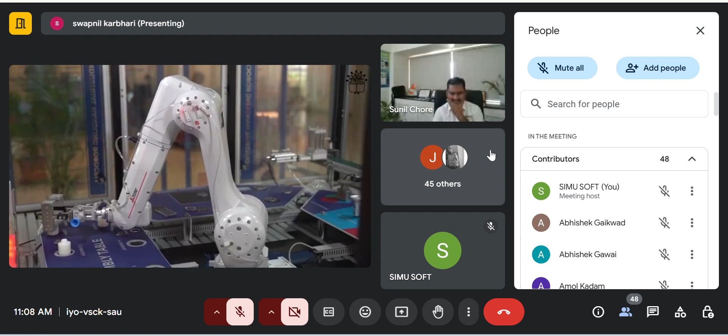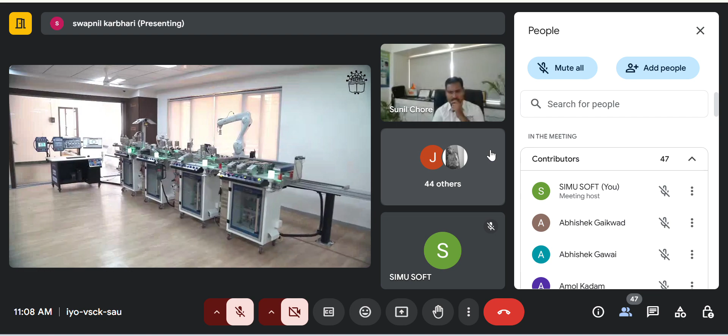To cater to the ever-increasing needs in this sector, Vidya Pratishthan Baramati has established a Center of Excellence in Digital Manufacturing and Robotic Automation. This Center of Excellence has been established in line with the vision of Honorable Shri Sharad Chandraji Pawar Saheb.

With valuable guidance and support from Honorable Pratap Rao Pawar Saheb as well as all trustees of Vidya Pratishthan, this Center of Excellence is funded by Finolex Cables Limited, and Simusoft Technologies Pune is the implementation partner.

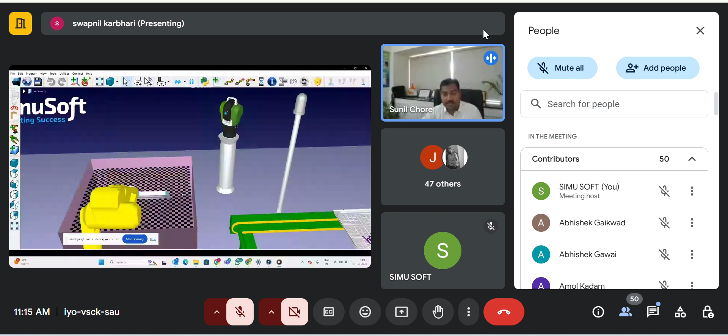So this is how we can really make the exact replica of your actual system in a digital environment and get your work done.

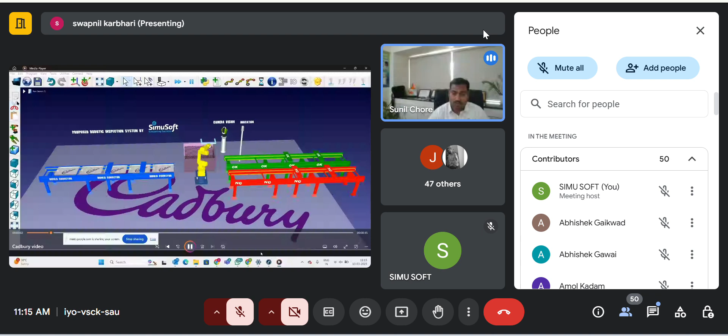Now, if you can give such problems to your students, you don't need to buy anything, you don't need to buy any big complex robotic system or vision system. But at least for third year and fourth year students, you'll be able to clearly tell them this is the phenomenal magic you can create in a virtual environment. And believe me, this is not only an animation product, it is hardcore software used by companies.

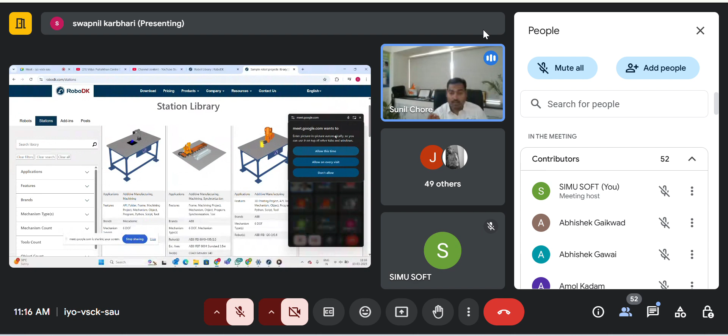Companies like Bajaj, Bharat Forge, and Pari use this software, and people who know this product have high chances that your students can be placed in very good career options in manufacturing, automotive, at any corner where robots are used.

So, without taking more time, I'll request my engineer to share the exact screen of the RoboDK product, and along with your involvement, we will create some simulation models of an existing problem using RoboDK. At the end, we will talk on AI integration with the RoboDK product.

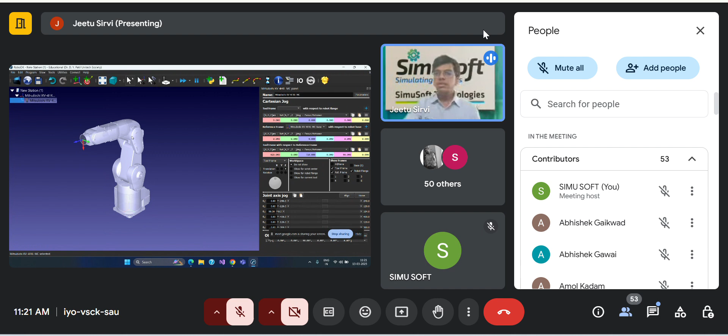By double clicking on the robot, you can see the panel. This is the teach pendant of the robot, where we can control its axes individually in X, Y, Z, and the other three axes are roll, pitch, and yaw.

Now I need a tool to perform an operation. There are various types of tools in our RoboDK software, like laser cutting, deburring, pencil tool, vacuum grippers, and various welding guns. Here you can see e-grippers, magnetic grippers, vacuum grippers, and generic paint sprayer.

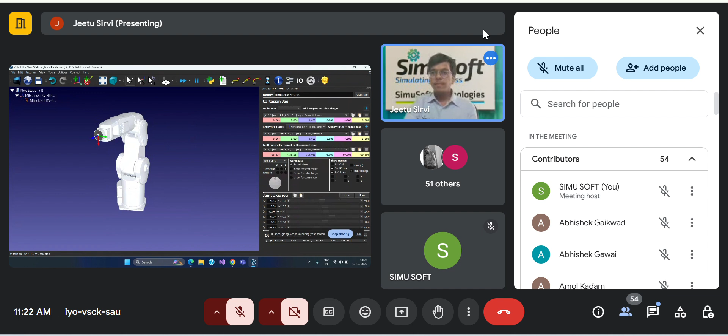Does anyone have questions from till here? Any questions? No. Okay.

So how does RoboDK simplify robot programming? Actually, there is no need of any hardware material required, and we can directly give the targets to the robot by moving the joints of the robot from the teach pendant.

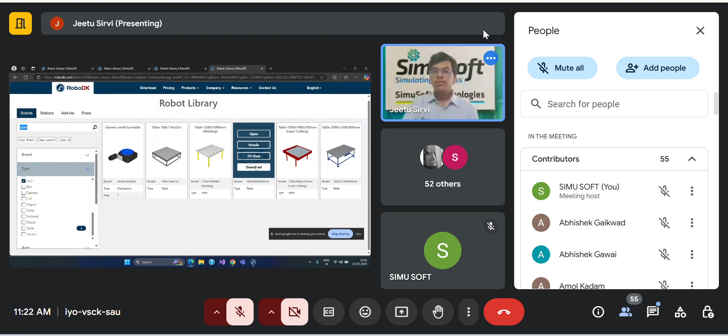Now I will open my online library and download a small table. We will add a table, directly download it and open it from our tab.

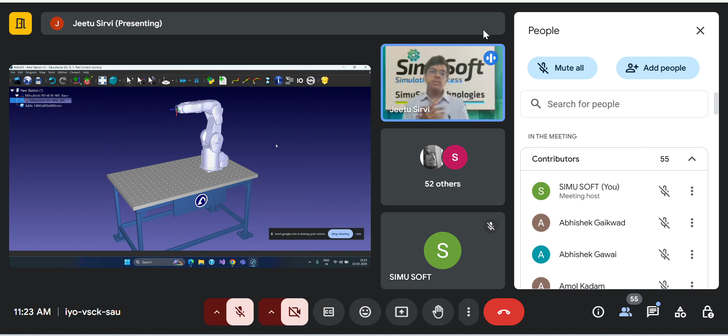You can see the base of the robot is directly attached to the table. It is very simple to use RoboDK software, and we can add this in the curriculum for academics from first to fourth year engineering students. It will teach them manufacturing, research, and how the assembly line works in the industry in real time.

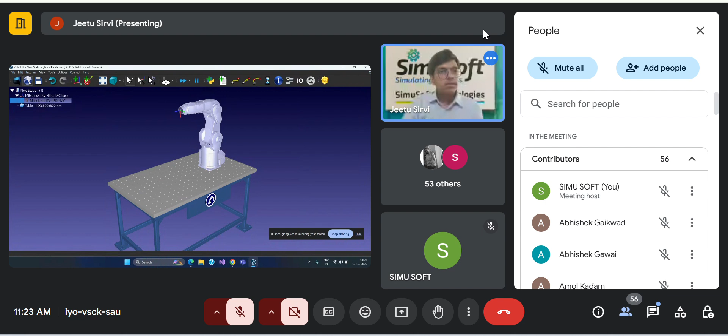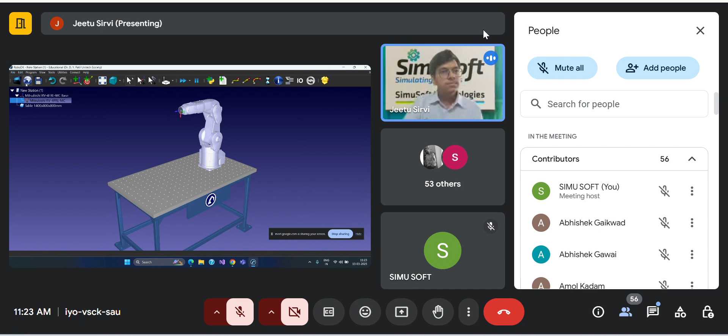So let us add a small cube or box to perform a pick and place application here. You can directly move the box from here using the teach pendant.

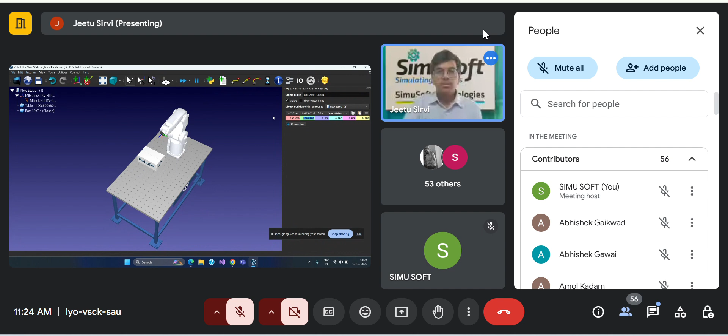Now there will be a question, right? By adding this star button from the keyboard, you can see the workspace of the robot. The workspace of the robot is the maximum range the robot can move or work in the environment, so this is the maximum reach for the robot.

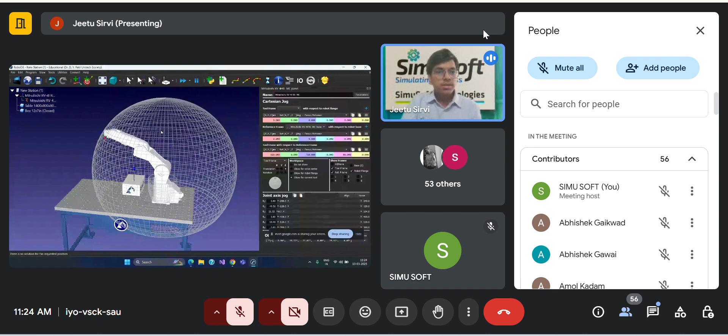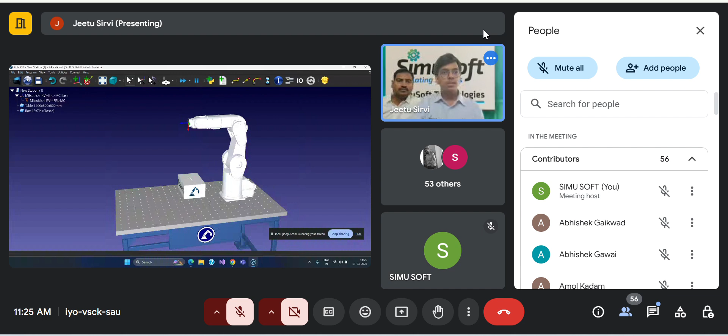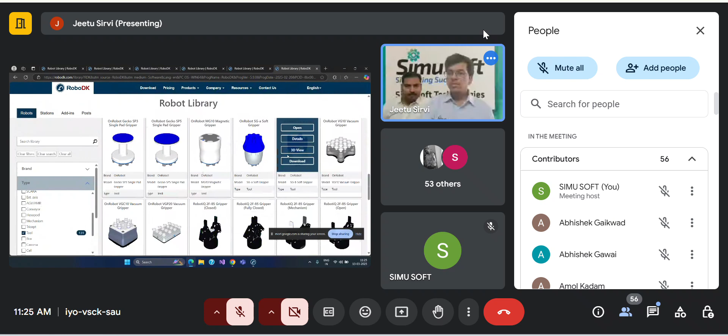Now we will add a gripper to the robot. Again we will go to the online library, go to the tools type, take a vacuum gripper, simply download it, go to our offline library, and add the gripper.

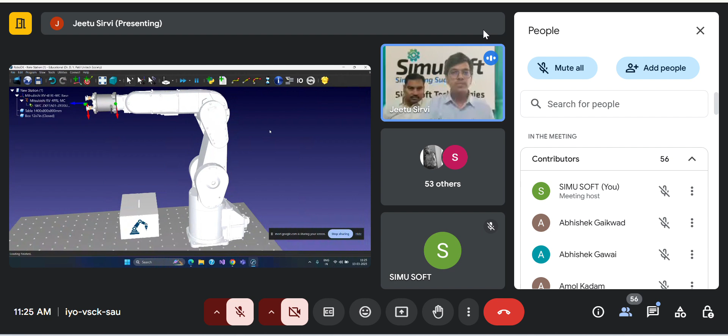You can see the gripper is attached to the robot at the end effector. Now the end effector face should be parallel to the box, so you can directly change the joint angle. The joint angle for the end effector is joint 5, so I will simply move it in joint 5.

Okay, simply I will set it to 90.

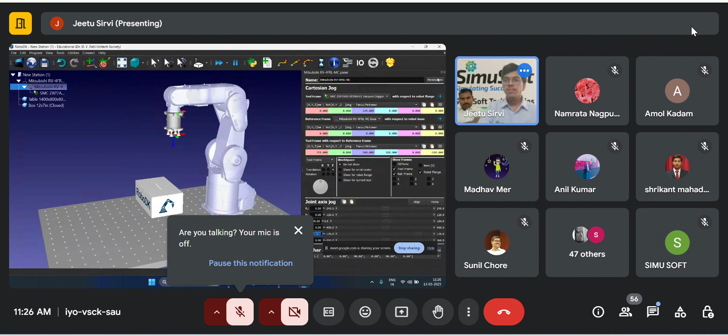Many industries use RoboDK for automotive manufacturing and assembling of various parts. Not only assembly and manufacturing, we can also do 3D printing, and we can integrate this robot with AI for various projects. It will be beneficial for students as well as for them at industries, showing how it actually works.

So till now, does anyone have any questions? Any questions till here? Am I audible? Yes, you are audible. Okay.

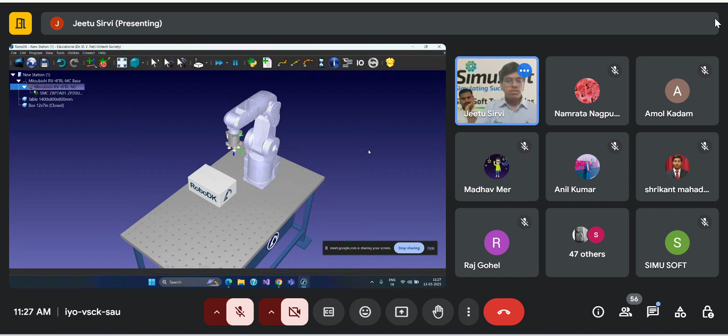Yes, sir, okay, right. So now I will simply program a robot in such a manner that it will pick the box from here and place it here. You can directly add this by clicking Alt, and you can directly move the robot in this direction.

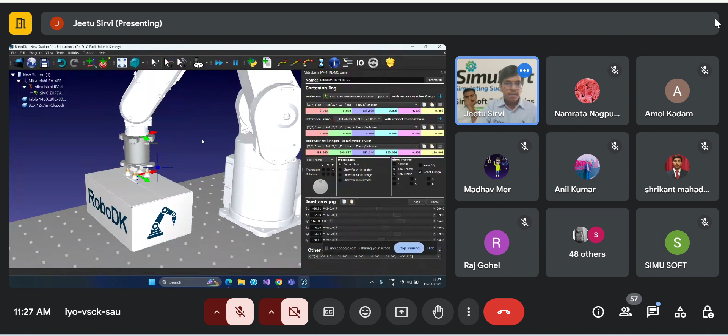Before adding a target here, I will give the robot a safe point, which will help in the industry to reduce the risk of failure or collision. So I will simply move it in the Z axis to give a safe point to the robot. This is the, you can rename it so it will be organized. Safe point.

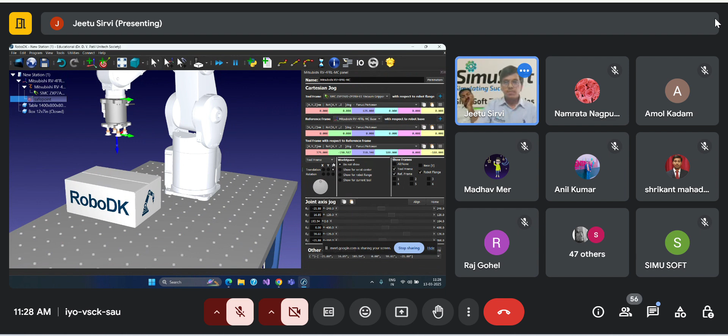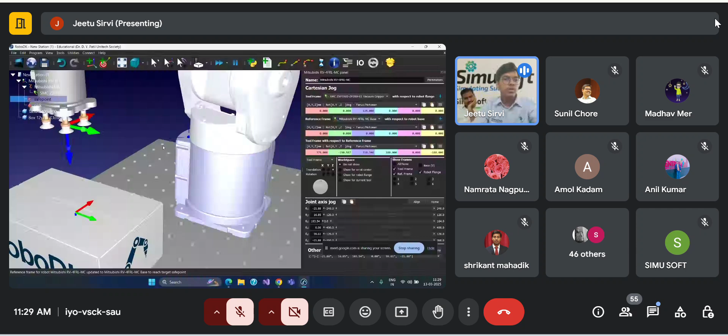Now we will add a pick point to the robot. Simply move in the Y direction. You can see here these frames: Y stands for green, X for red, and blue for Z axis. So now I have to move the robot in the Y direction to place it here.

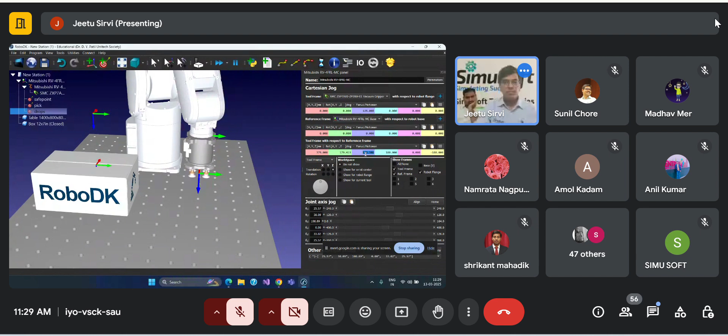I will simply move it in the Y direction and add a drop safe point to the robot. Drop safe, we will give the name Drop S. Now simply add the drop point. And we will add a home position for the robot.

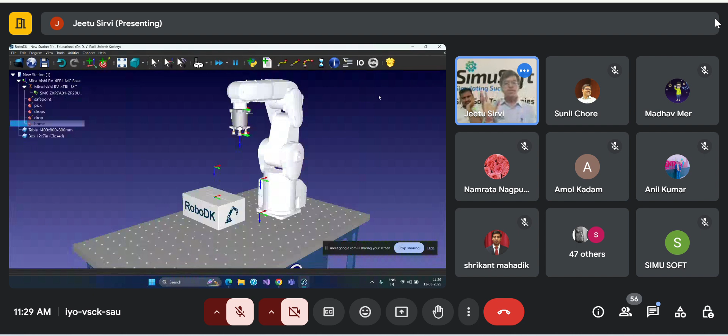Now we have taught the robot the targets that it has to move to. To give the movement, we need to program the robot. So we will add a program function and give it the name pick and place. Now clicking on home position, you just give the joint angles to the robot. You can see here joint angle, linear movement and circular movement. So we will add joint movement.

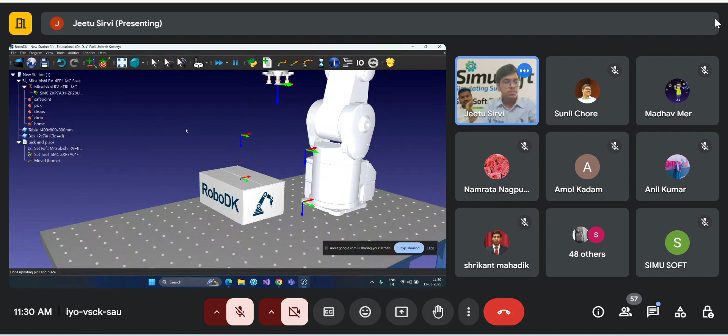You can see in the robot tree, in the pick and place program, the home position is added. Now safe point, pick point, again to the safe point, drop safe point, drop point, drop safe, and back to home.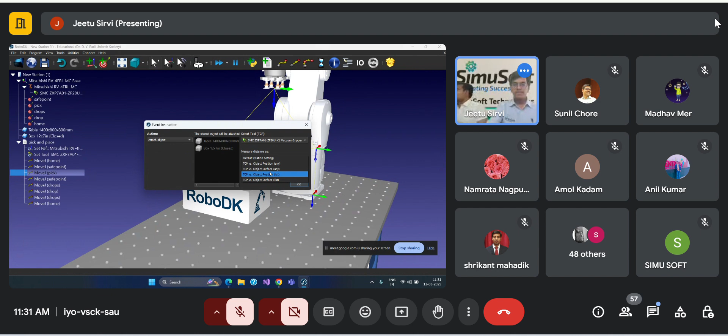Now the robot will only move in the sequence: save point, pick point, save point, and drop point. We have to give the program a command. How do we give the command to the robot? So you can simply right click on the pick position and add instruction, then click on simulation event instruction to attach and start the gripper, and simply click OK.

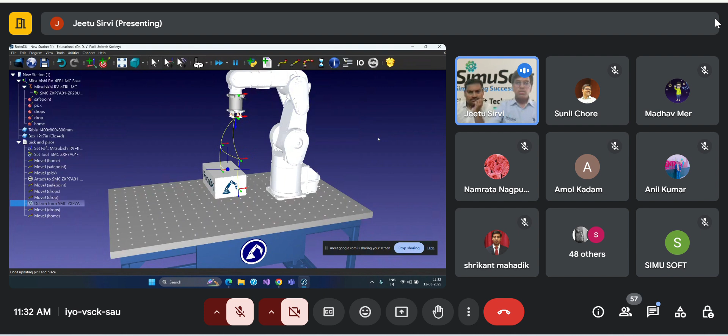Now we will simply do the drop point with the same process, simulation instruction detach. OK. So our basic pick and place program has been completed, and we can simply run it by clicking on the pick and place program, double clicking it.

Here you can adjust the speed of the robot by simply dragging. Now let us run the program. So you can see the pick and place movement here, right? Now let me undo.

Till here, does anyone have any questions?

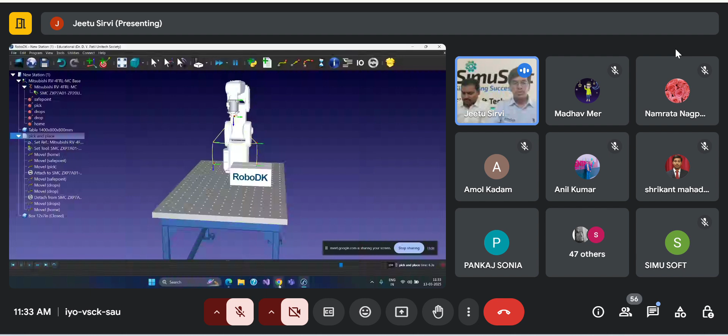What type of information can we extract through the simulation? Information in what ways, can you reframe the sentence? Information in terms of the publication part, or some data. Hello, what data can you extract, sir? Dr. Pankaj from GLA University. Okay, so this is a product where you have to create the virtual replica of your robotic system. The entire robot program you can get and give it to your publication. I mean the analogy, what I will tell you: you must be knowing CNC machine, right?

Yes. So in a CNC machine, what do you do? You use a CAM product and create the G code, M code automatically. Now similarly, if you want to build any robotic system, you can't immediately go on the shop floor and start building it. Before that, you need to run a simulation. Once that happens, you can create that entire simulation code. You can put that code on the actual robot and make your robot move according to that data. That entire code you can attach to your publication, you can actually dump it on your robot controller and make the system move. Okay, that's the coding we can extract from this simulation.

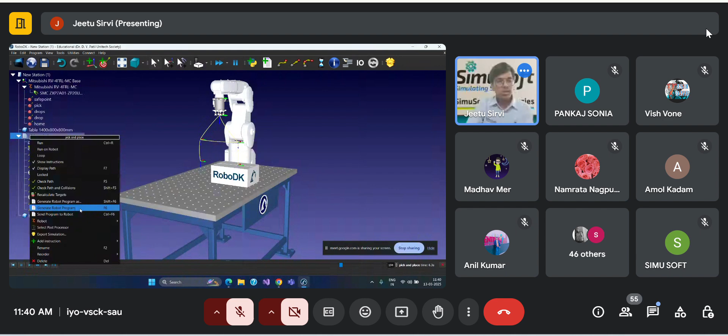So there was a question, right - how to generate the program? We can directly click the program here and generate program, right? Able to see the program here, generate program option. You can simply generate the program and the code will be in Python script.

See, this is the code for this program that we have just simulated. Pankaj sir, are you able to see this code? Yes, yes, we are able to see. So this is the code for this program - we can directly feed it to the actual robot, and the robot will move in the same manner as it is working in the simulation.

So, more questions? Is it possible to design our own grippers and use them? It is very much possible - you can directly add the CAD file and import it directly to RoboDK. The type of gripper you want and the design you want, you can directly add it to RoboDK, and you can customize it also.

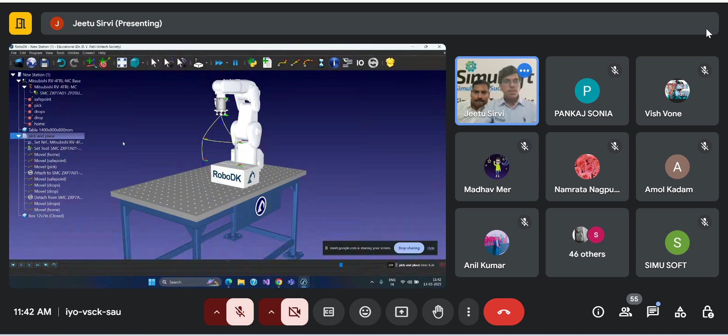Can it connect with ROS? Yes, yes, we can import that - we can connect with that. Yes, RoboDK can be connected with ROS system directly. What was the question - how to import the CAD file, right? So basically you have to download it. Suppose here is my interface, and you have to just import it directly from our online library, the CAD file that you require.

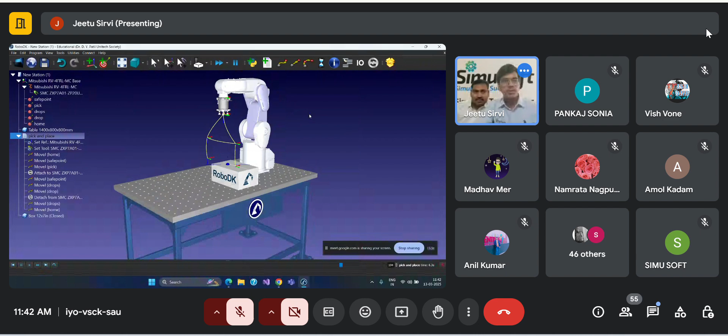So now should we teach them the AI integration? Yeah, I mean first of all, Vivek, are you there? Yeah, I'm there. Can you just explain, share your views on how AI can be integrated with robots?

Before that, give me the liberty to explain. Can you just show me the ready-made models which we already have created, since we are now at the end of the session. Ready-made models, like the kind of Cadbury model we had shown them. Okay, similarly if you have other models, can you just show them?

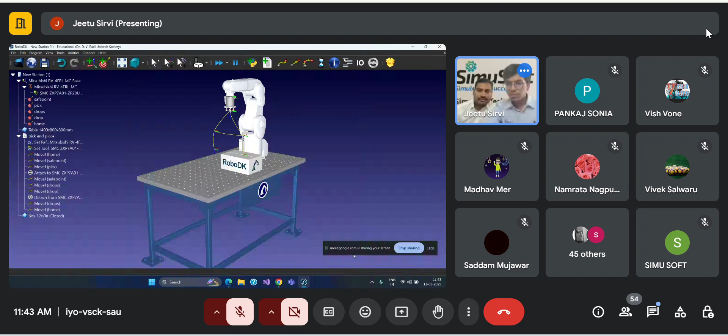We had made different products, right? So basically, you can see how powerful this software is, that you have various applications like additive manufacturing, machining, material handling, conveying, assembly. These are all the models. You can directly download it and open it in the RoboDK software.

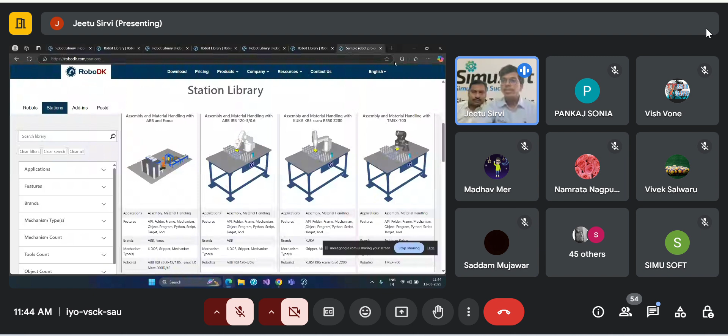I will give a try. So I have downloaded an assembly file. See how assembly works, and the same program we can generate and feed it to the actual robot. I will reduce the speed. This is how assembly is working in RoboDK.

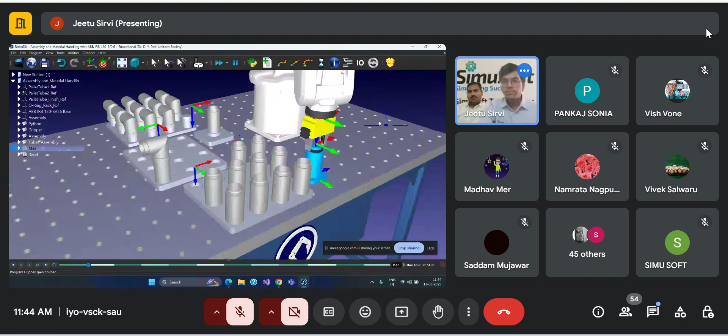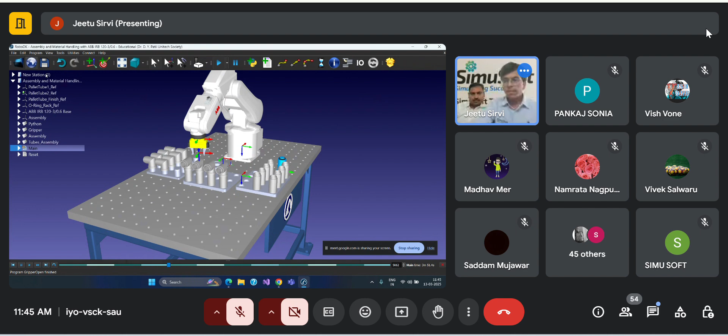So you can see this is the beauty of RoboDK, where we can do not only pick and place but also assembly, material handling, 3D printing, conveying, drilling. These are all the applications for RoboDK. Now, Vivek sir, you can continue.

Okay, thanks Jeetu. Jeetu has very crisply explained how RoboDK works and what applications we can have in terms of industry level products. So there are two things here, as he has already explained: one is the simulator, and one is the actual robot, right?

So it's very important that you get a very good knowledge of how to use the simulators, because there are certain actions which you cannot directly perform on the actual robot. If there is an error in your program, and it results in a very massive movement of the robot arms, it can actually damage your robot, and these robots are really very costly. So simulator is always a very good playground for all of us who are new to RoboDK, or rather new to robotics, and getting a handle on RoboDK would be the first step. After that, you can go on to the actual robot and get an idea of how the actual robot works. So this is the background that was set.

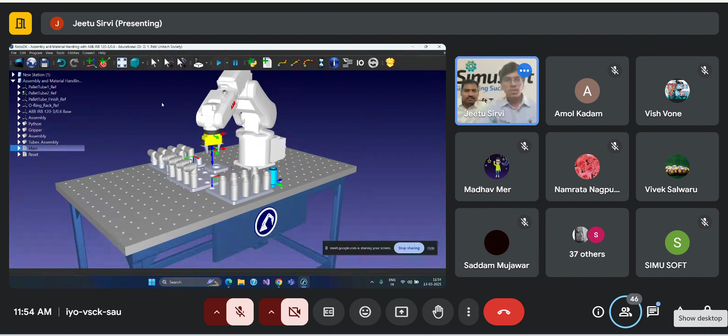So by simply taking a robot from my offline library, suppose I'm taking a UR10 robot, adding a camera to it.

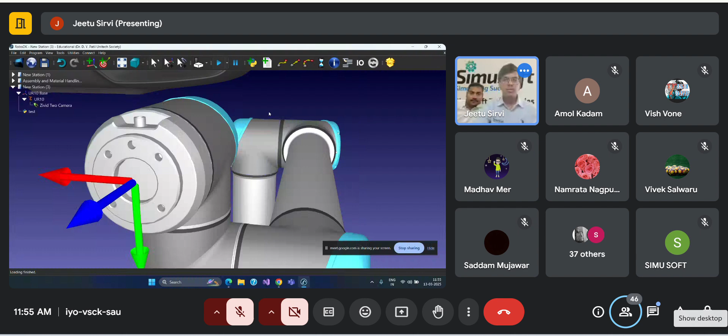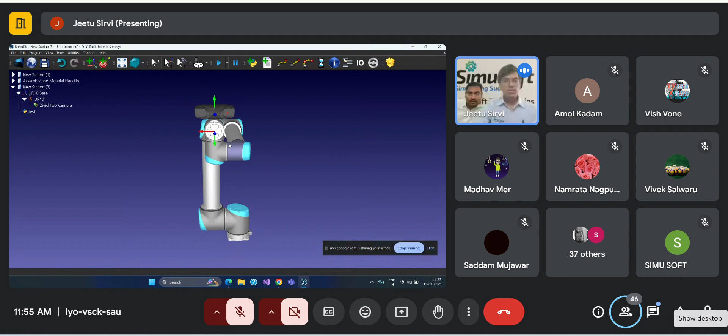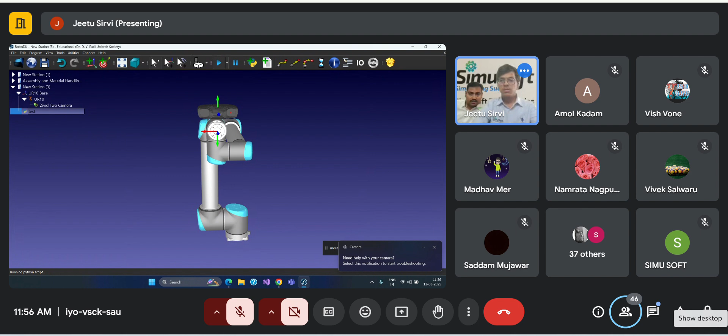The Python script that is already created will try to coordinate with the robot and camera. So I will simply run the Python script in my RoboDK. Let me show the script first. So this is my Python script.

Ma'am, this you can also get on ChatGPT, it is readily available. Technology has evolved so much that we just need to reap the benefit out of it, and you should have some ready-made tools with you. Once you are there, in no time we can enjoy any applications of robots and AI. So this we already have taken from ChatGPT, isn't it?

Yes sir, and now we want to win your confidence on how seamlessly it can integrate with RoboDK. First of all, I need to turn off my camera. Can you see my screen? Yes. Okay, should we run the program, sir? By simply double clicking on the program.

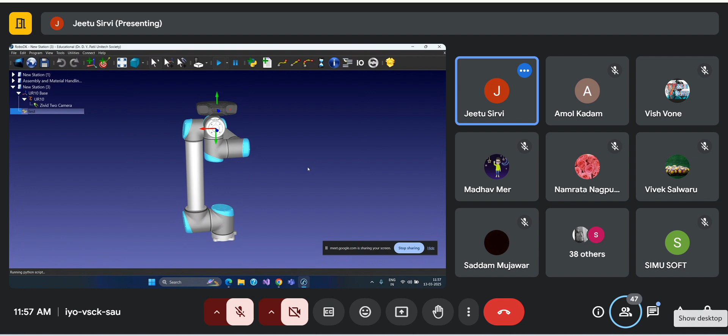Are you able to see? My robot is moving in such a manner as how I am moving. Can you see the screen? Yes, it's visible, but now it's just getting stuck a bit.

As Vivek sir rightly mentioned, it is now detecting the face of Jeetu, and according to that face movement, that robotic arm will move its position. You can see the movement here, right?

Now I will change my movement, let me come into the frame, a little bit slower. Now the existing laptop camera, the computer camera, has taken into consideration the virtual camera on RoboDK, which is also aligned with it. Now I will move accordingly, and that robot arm will move. It's lagging, a little bit, but it is moving.

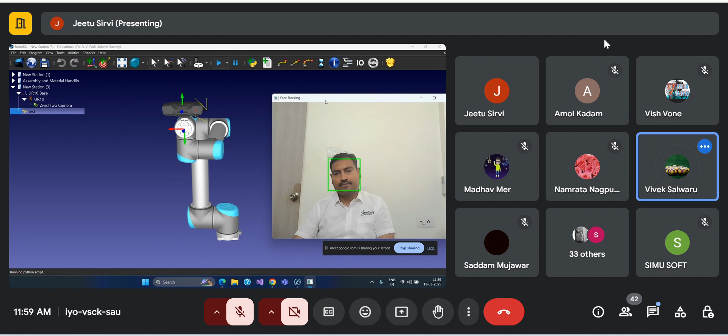Second use case is NLP, natural language processing. I should be in a position to instruct the robot by speech. If I say, hey RoboDK, pick up an apple, this speech would get converted into text, and that text would be further processed by RoboDK, and it would do the necessary action.

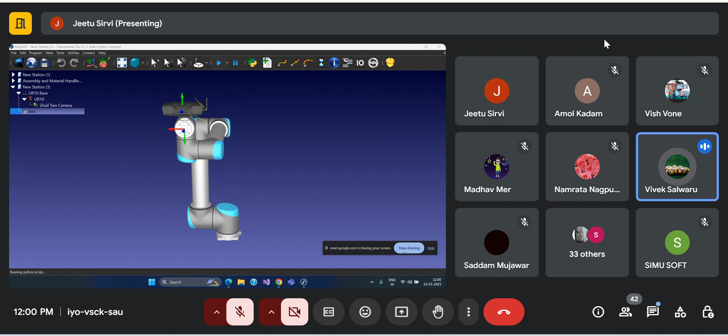So here another flavor of AI, natural language processing, comes into picture, where you are instructing the robot using some human language. This is another thing which is very useful and can be used in future wherever there is an instructor who wants to perform some job depending upon his instructions. This is NLP. Now, one more interesting thing in AI is something called reinforcement learning.

This is a bit complicated, but I just wanted to mention it here so you understand its importance. Now, let's get on to a different topic to understand this in a better way, that is reinforcement learning. Have you guys heard about the Alpha Zero computer?

So what this AlphaZero is, it's an AI model which learns chess moves of its own. It has defeated one of the grandmaster chess champions. So how did this AlphaZero actually work?

It worked using reinforcement learning. What this means is, whenever I make a move, either it can happen that it is right or it is wrong. If it is right, I assign some positive rewards to that model, so it knows it has done something good. Now if the next move is wrong, I reduce its rewards. Like if initially the reward points were 5, then if I give -5, I come back to 0.